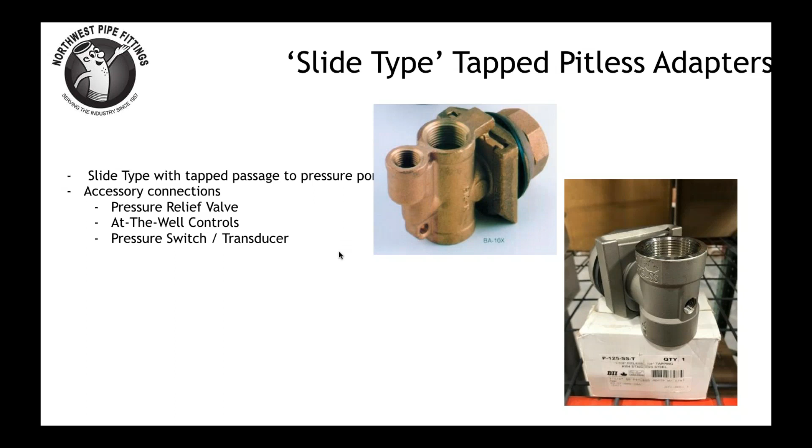Picture on the right is the Boshart stainless steel pitless adapter. It's actually got a 1/4 inch female tap on the back side of it. You'd have to put like a 1/4 inch street 90 or a fitting in here, most likely a 1/4 inch street 90, and point it up to get the same type of connection you'd get here for either an at-the-well control, pressure switch, or some of the accessories that you hook into that port.

Like I said, a pressure transducer. Some guys put a pressure relief valve in there, so if the pump system does overpressurize, your pressure relief is popping off inside your well, so all the water goes back inside the well rather than having to plumb it out of a mechanical room or not having it plumbed and making a mess, obviously.

We just started stocking this one. We get a lot of interest in this at the Waterwell show still. If you got any questions about this stuff, let me know and I can give you the part numbers or tell you where it's at.

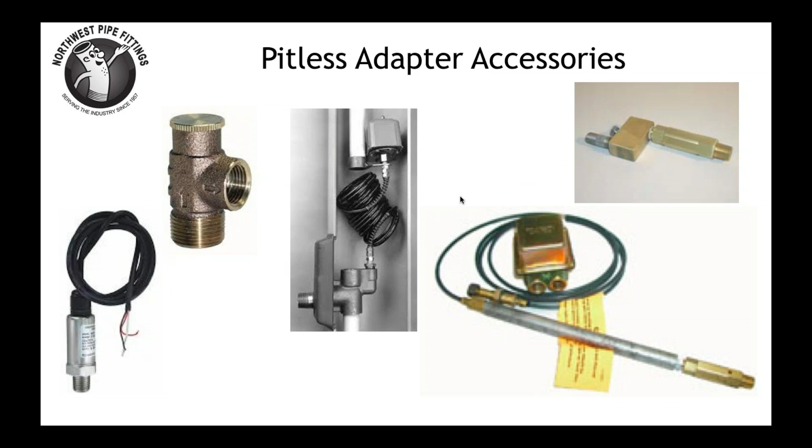All the slide type pitless adapters are going to have a weight limit. Campbell's weight limit is actually in feet, and that's feet of whatever size pitless it is of steel pipe full of water. So you take a BA10X or a B10X, which is going to be a 1 inch drop pipe, and you're good to 970 feet.

On the Boshart one, they actually give you the weight instead of the feet. So you'd have to calculate your pipe size with the water in it, calculate your pump weight, calculate your wire size and the wire weight, and figure it that way. The Boshart stainless steel pitlesses have a higher working load than the Campbell pitless adapters.

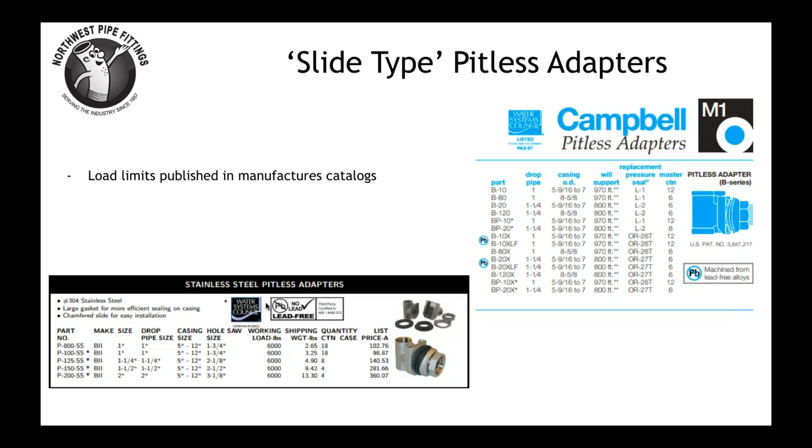This style of pitless gets a lot heavier weight limits. They make these in 1 inch through 4 inch as far as drop pipe size. Well casing is basically, on the smaller ones you can do 4 inch, and the larger ones like the 10J4s, you can go all the way up to 16 or 20 inch well casing.

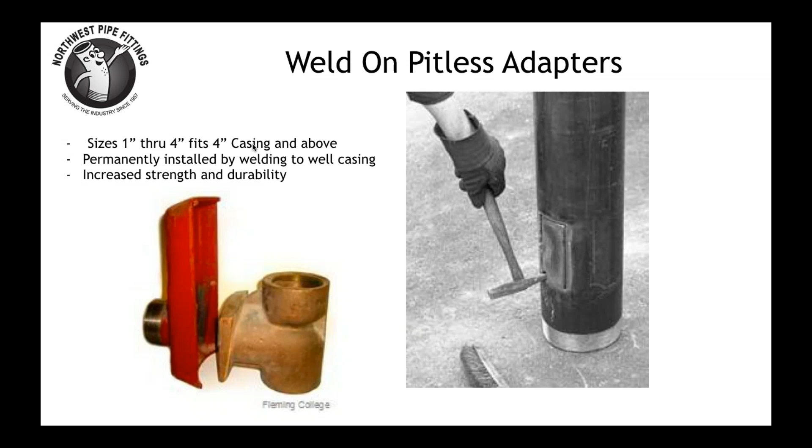A lot of guys don't like this style because they're such a pain in the ass to set the drop pipe or set the inside. It's kind of a trick to get this to set inside the wedge or the slide fit, so a lot of guys will avoid these unless they have to use them. But they're quite a bit less money than, say, a pitless unit. If you need something with 4 inch drop pipe or something, your only option would be something like this or an actual pitless unit.

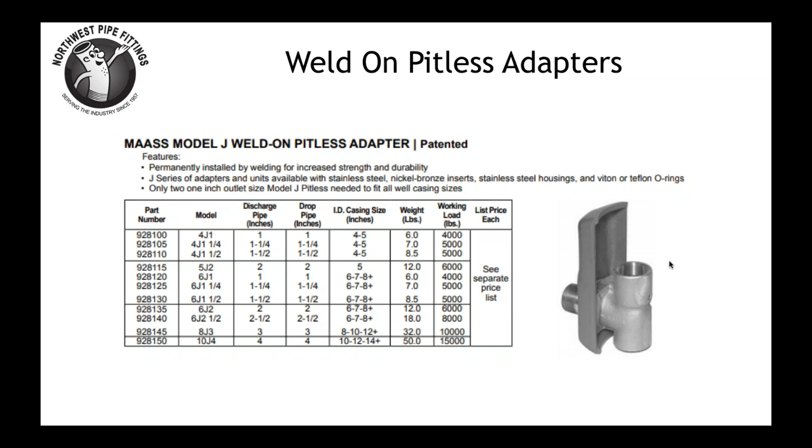Another pitless style is the Clearway, or you could hear them called the Snappy, which is a Baker monitor product, or the Bulldog, which is another Baker monitor product. Snappy and Bulldog, the difference is galvanized or brass.

Usually the sizes for these, I think the only ones out there are like 1.25 inch for your drop pipe, and fits the smaller well casings, 4-inch through 6-inch. The reason you would use one of these primarily is because say on 5-inch or 4-inch well casing, if you'd put a BA10X in a 4-inch well casing, you wouldn't be able to get a 4-inch submersible pump in it because the stationary piece would extend into the well casing so much you couldn't get a path. So that's where you'll see these things used.

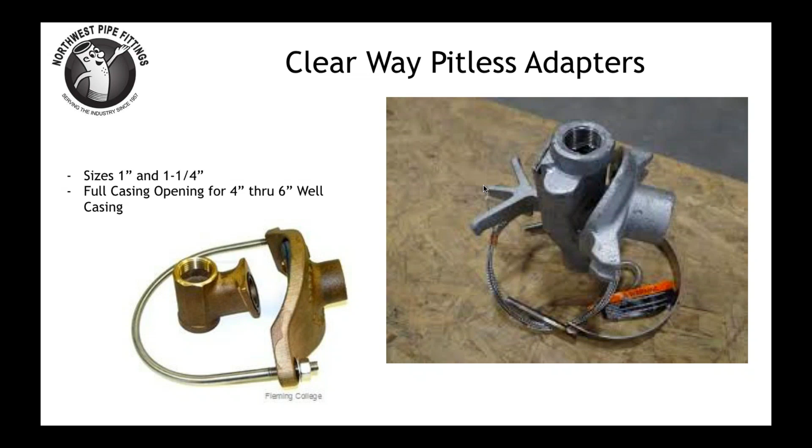There's another picture of it installed. So you got a clamp, some kind of a clamping device around the well casing. The piece on the outside is the stationary piece, has got an O-ring behind it. And when you set the inside piece, the whole inside part of the well casing is available for a full opening.

Generally, they'll have some kind of a release device on the back. This one's got a cable attached to a spring actuated lever or an arm on the back side. And when you remove the pitless, you have to pull that stainless steel cable up and then work the inside of the pitless out to pull it up. Again, these can kind of be tricky to set because you got to go down and then somehow push that inside assembly into the stationary part as you're setting the pitless. Of course, the lever helps you with that.

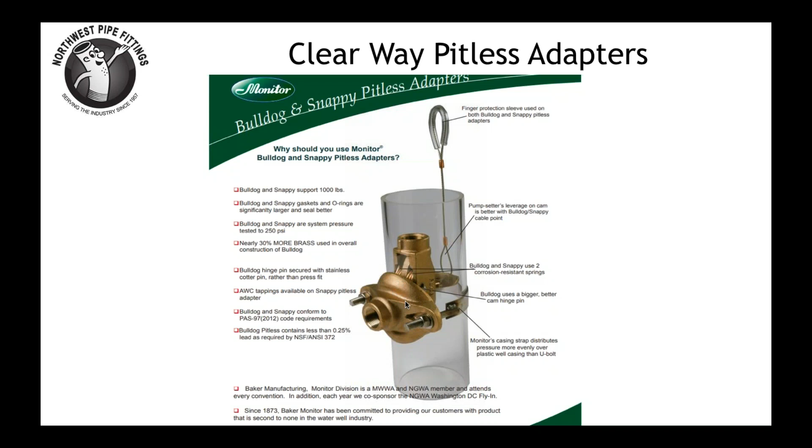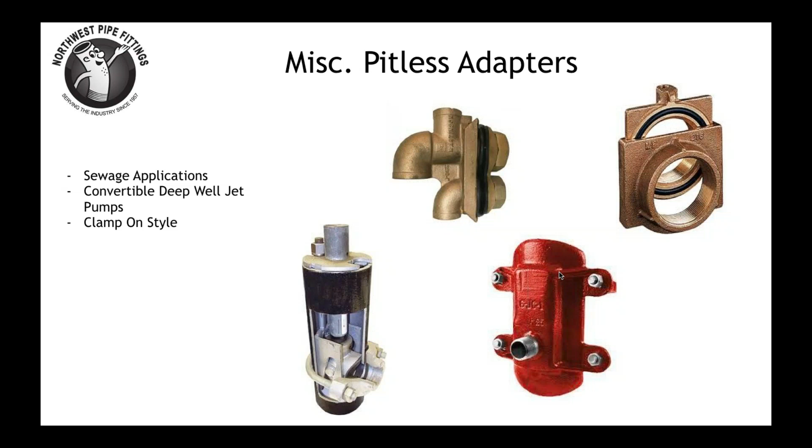So the difference between the pitless unit and a pitless adapter is a pitless unit will actually take the place of the top 6 or 8 feet of your well casing. So you cut your well casing off where you install a pitless unit, and the whole head of your well is now a pitless unit. It's considered a pitless. You'll see this primarily in larger pump systems, municipal projects. Every municipal well that I've ever seen has a pitless unit on it.

The sizes get all the way down to 4-inch well size, so they come in the smaller sizes. In fact, North Dakota state regulations require every well to have a pitless unit on it. I'm not sure why they do that, but in Billings and Sidney, we stock a couple of the pitless units with the North Dakota spec. Most of them are either a 4-inch well or a 5-inch well.

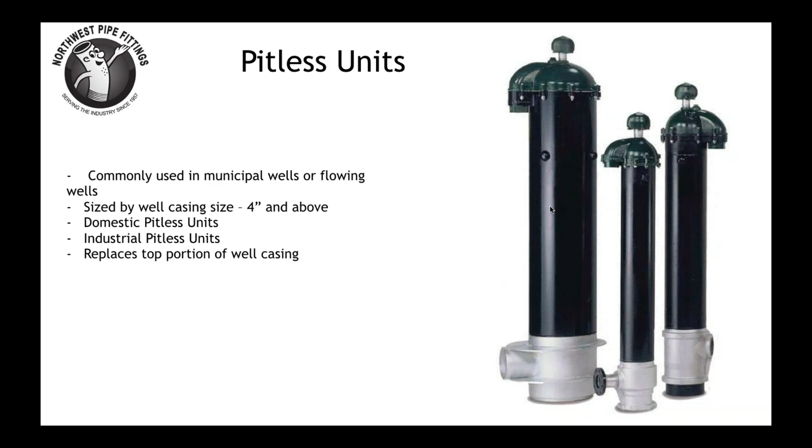So on the pitless unit, you got a couple different ways to connect to your well casing. The smaller ones can either be threaded connection or what Baker calls their Kwikonect style, which is basically just a compression adapter on the bottom of the pitless. So you slide it over your well casing, tighten the bolts around it, and away you go.

So to size the pitless units is a series of numbers. You can kind of see on the right what each one of them means. Generally it starts with your bury depth. PS is always going to be part of the part number. The next two numbers are your well size and then the upper casing. The upper casing is always going to be one size larger than your well size because of the way that the spool fits inside the pitless unit. Say your well casing is 4-inch, your upper casing on your pitless unit will be 5-inch. If it was 6, this would be 8. If this is 8, this would be 10, so on and so forth.

A couple other things that the part number will tell you is your connection, and N would stand for Kwikonect. The B is always going to be B unless it's something uncommon. I don't know what the options there are. I suppose if you needed stainless steel or something, that might change.

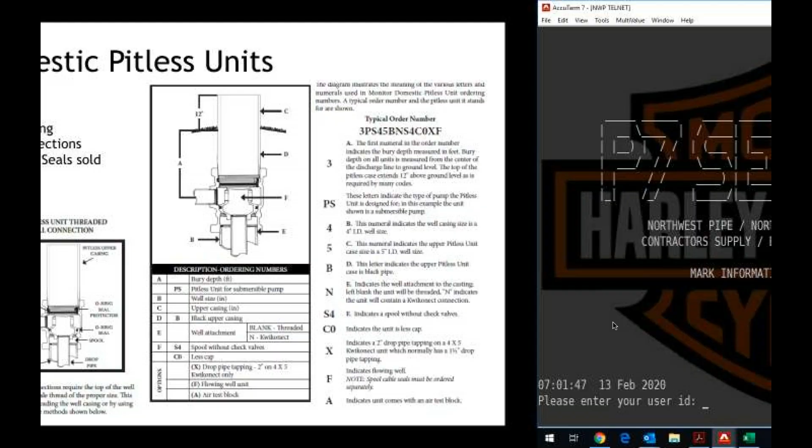If you look at some of our stock, so that unit right there is one of the North Dakota specs. So 7-foot bury. PS is just a pitless unit for submersible pump. It fits a 5-inch well, 6-inch upper casing, black upper pipe. N stands for Kwikonect. S4 CO.

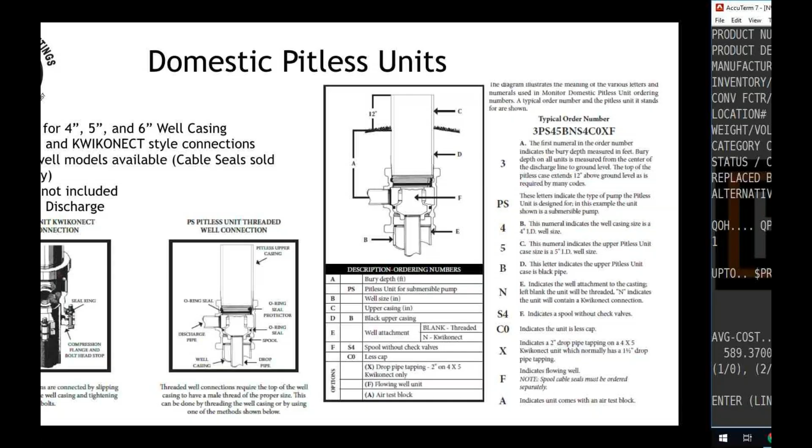I thought it indicated the drop pipe size, but that should be a 2. Anyhow, the CO stands for less cap. So if you see that CO in the part number, that would indicate that the pitless unit does not come with a cap. So if you were selling a well cap with this pitless, it'd have to be a 6-inch well cap, because you got a 5-inch well, but your upper casing is 6-inch.

And normally you would sell a well cap with pitless, so you'd want to make sure you get a 6-inch, not a 5-inch.

I guess S4 just indicates spool without check, that's what the S4 indicates. So most of the domestic pitless units have a 2-inch discharge, 2-inch drop pipe. In fact, all the ones that we stock. If you order say 1.5 inches from Baker, really all they'll do is put a 1.5 inch bushing in it, so we'll just stock the 2-inch.

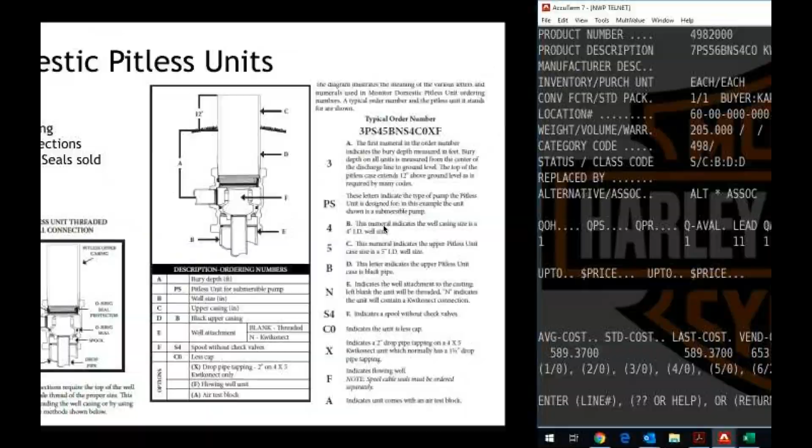An industrial pitless unit, usually the industrial units start at 6-inch and go all the way up through 30-inch. That's an awful big pitless unit. Connection styles for the industrial units would be either welded or the compression style. They do make a threaded version of that - you'd have to buy an adapter from Baker. Basically it's just a thread by welded adapter to put in the bottom of the pitless that goes into your well casing.

That's kind of an example of how they're installed.

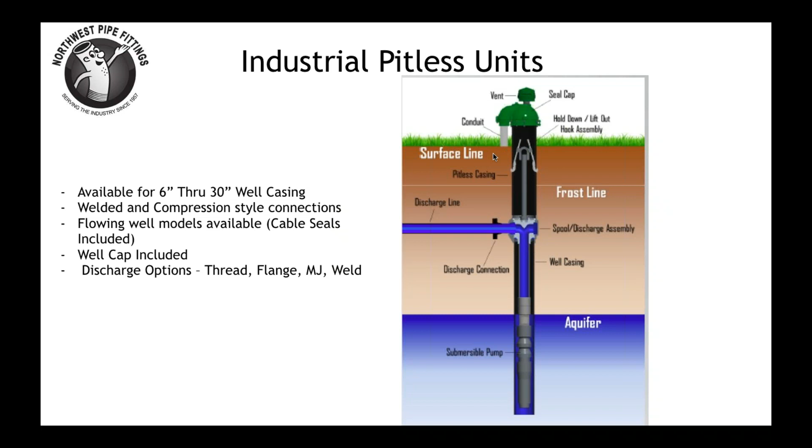Another thing to be cautious about is the bury depth. When you size a pitless unit, the very first number is the bury depth. Baker accounts for 12 inches of bury depth between grade and the top of the well. You can see there it says 12 inches, so a 3-foot bury would be 3 foot from grade to your discharge, leaving you 12 inches above grade. So that pitless unit, in theory, would be about 4 feet long. Realize that in Montana, the state code is 18 inches from grade to the top of the well. So always add - somebody wants a 6-foot bury, either go up to a 6.5, like a 6.5 PS or a 7 PS, so you make sure you get your full 18 inches of wellhead above grade in Montana.

So if you look through all the pitless unit part numbers in category 498, you won't see very many 6-foot buries. They'll all be 6.5s or 7s or 8s or even deeper.

The part number sizing on the industrial units is basically the same as the domestic units. Most of the numbers mean the same thing. A little bit different on the connections.

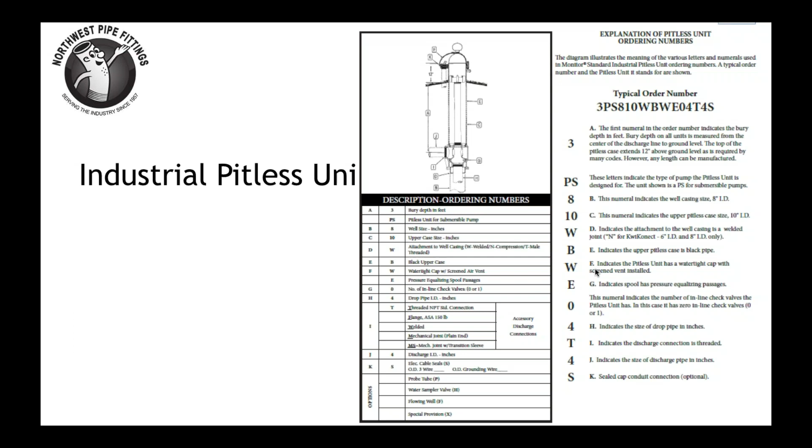Cable seals are sold separately on the domestic units only. On the industrial units, they'll generally come with the unit. You'll have to specify the wire size, I'll get to that in a second.

One thing to be cautious of on the flowing well pitless units is the pressure of the well. That's the static shut-in pressure of a flowing well. In other words, if you were to cap that well off with nowhere for the water to go, that's the static pressure the well will build. Flowing wells can be anywhere from 1 or 2 pounds to 100 pounds. Some of the deep wells up around Big Sky or hot water wells can build some serious pressure.

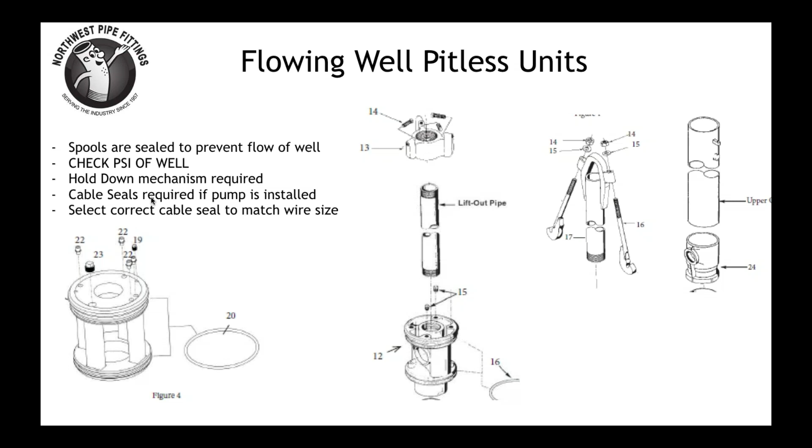Cable seals again, I think I got a slide on cable seals. Cable seals have to be sized. Number one, for the threaded port on the top of your pitless unit, there's going to be threads in here.

Also, you've got to size them to your wire size. We stock a couple different ones, one with a 3/8 and also I think one with a 1/2 inch threaded connection, and then always look at the wire size. There's a range - I think our smaller ones will go from number 12 wire through either number 8 or number 6 wire. There's a chance you'd have to order something separately that we don't stock if you're using something outside the normal everyday application.

Any questions on that?

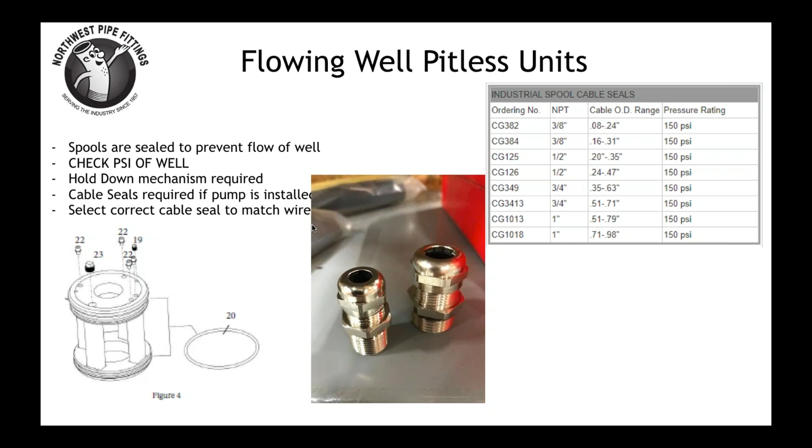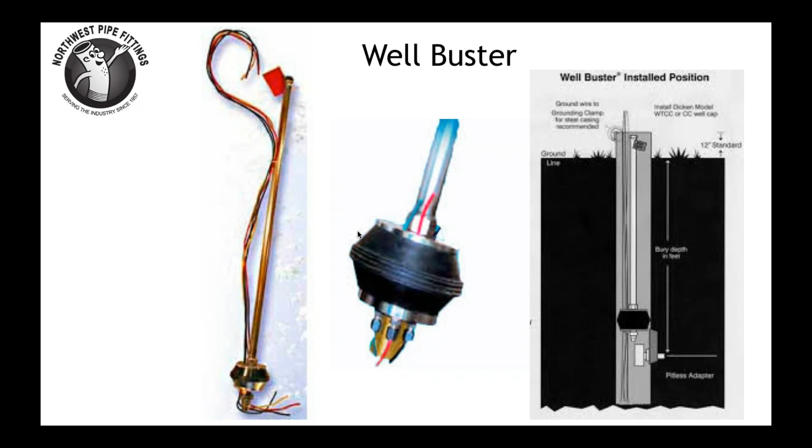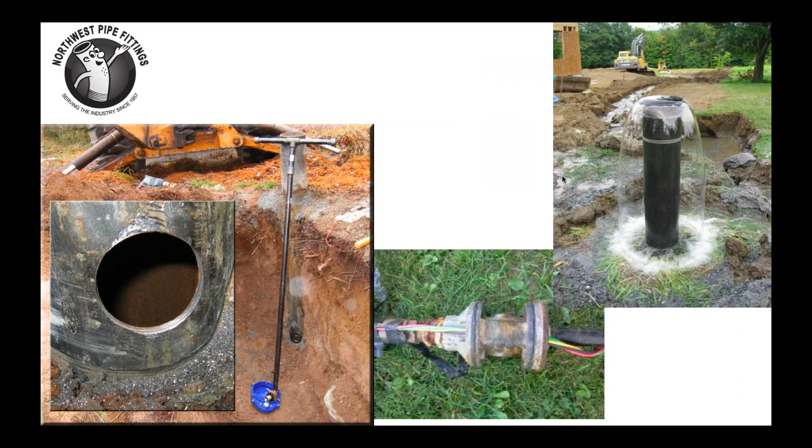The picture on the left is just like a swedge style pitless adapter being installed. Cut a hole in the well casing. You rig yourself up a pull pipe, which is basically just a piece of 1 inch or 1.25 inch pipe, depending on the size of the tap. Put a T-handle on top of it.

So what you do is you lower this down the well on the installation. You see he's got his pitless adapter connected on the bottom here. Lower it down the well. You push out the male nipple through here, put on your gasket, and then your backing nut, your backing plate, and your nut. You secure that so you get the support of your drop pipe plus the discharge to the well. So that's what that would look like.

Pictures on the right, there's a flowing well. That's a pretty good amount of water coming out of that well. There again, there's a spool. I don't think that's a flowing well spool. The wires would be separated through some cable seals. You see the O-ring on the top and O-ring on the bottom.

And your drop pipe would be connected on this end. As your pump's flowing water, it's going to flow water through this spool and discharge it between these 2 O-rings, and then kick it out the discharge of the pitless unit.

A couple other pictures. There's one with the pull-out pipe. So that pitless is either being ready to be pulled out or just got set, one of the two. This picture down here is a pitless that was just installed. Here he's cutting a hole.

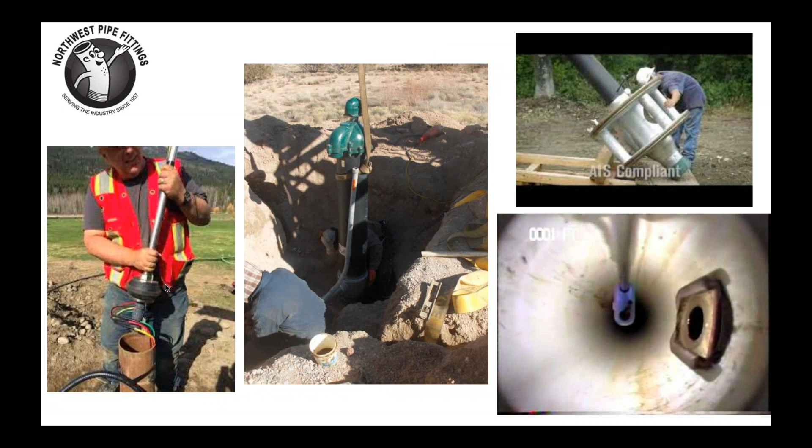A couple other ones. Here's a well buster being installed. Another pitless unit. Looks like a pretty shallow set compared to what we see in Montana. Top right, that's probably one of them 30-inch spools. That's a big ass spool there. Then the picture on the bottom right is the swedge style pitless installed.

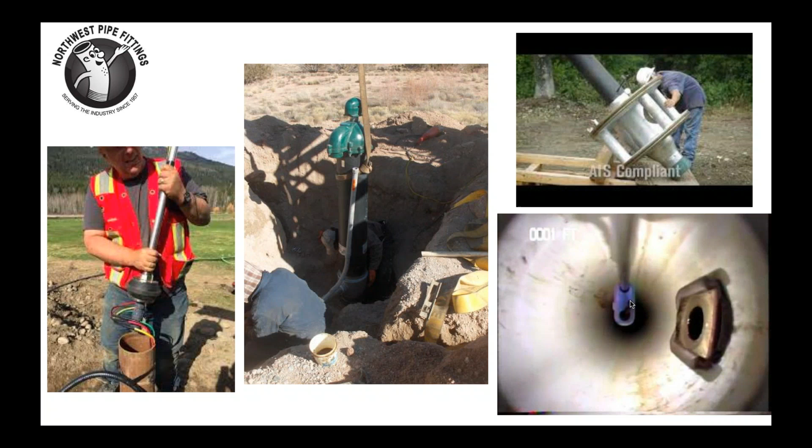So you can see in a 4-inch well casing where this portion would stick into the well casing too much to get a 4-inch pump past that. So that's where you'd use a clearway. My guess is this is either probably in a 6-inch well. I don't know what this thing in the middle is, but that's really all I got.